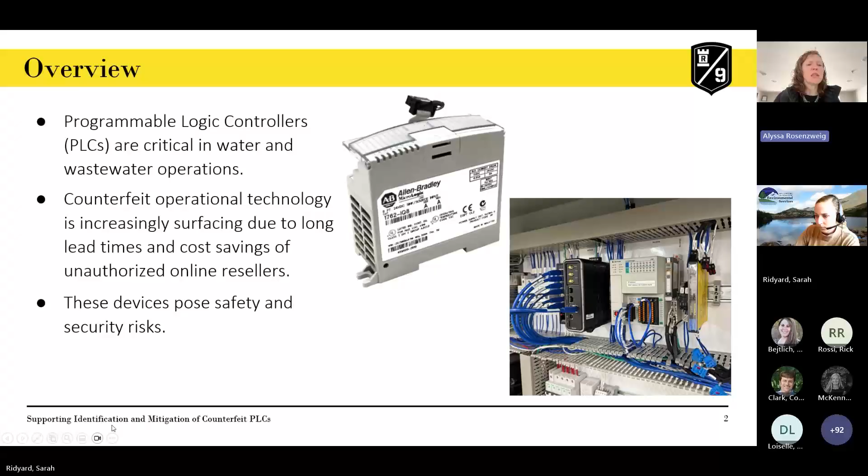So, next slide—we wanted to walk you through identifying if one of your items is counterfeit, meaning nobody knows what that device was actually designed to do, whether it's going to do harm to your environment, or whether it's going to allow foreign adversaries access to your environment to do Lord knows what. We are still actively trying to get our hands on some of the ones identified in New Hampshire to see if they were malicious or just more knockoffs.

Part of that effort is spreading the word of the threat and helping make sure folks check to identify if they have any counterfeit PLCs in their system.

You may be aware, you may not be aware. Sometimes it's a choice you make when you've got a budget constraint, and you think, I've got to get some parts from eBay. Or there's a timing constraint—something is actively failing and you can't get it through a valid supply chain. Either way, you still need to check if it's any good.

One important thing to note: your default move to check if something is real would be to reach out to the manufacturer. But we've found that isn't even enough to give full reassurance, because there could be a valid serial number that counterfeiters are just reusing on multiple devices. So it really requires looking more closely at what's going on.

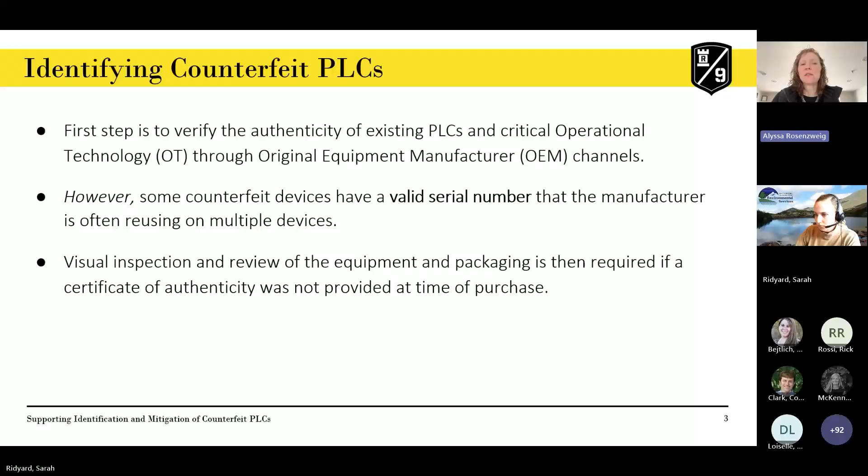In the next couple of slides, we wanted to give you some visuals of what this might look like. They're subtle—you're looking at that cartridge or the packaging you might have. This is exclusively, to our understanding right now, within this Rockwell Automation Allen Bradley family.

We're fortunate that DES and a bunch of other folks in the cyberspace are ready to support you in many generous ways. If you've found, willingly or unwillingly, that you have a counterfeit device, please reach out to the email address provided. We'll work together to walk through the steps to remove it, identify what's going on, and create a replacement plan. We're really trying to make this free where we can, following all the steps and collaborating together, knowing financial hurdles are huge when you're trying to run an operation.

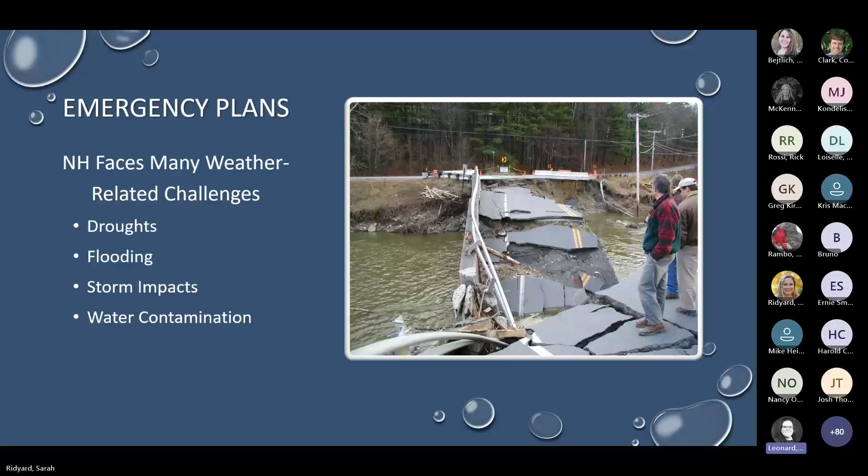AWIA is America's Water Infrastructure Act of 2018, signed into law October 23rd, 2018. The purpose of this law is to make sure community water systems are prepared for emergencies. It requires water systems serving more than 3,300 people to assess their risks and vulnerabilities to natural disasters, hazards, and malevolent acts. Along with an assessment, you're also required to develop or update your system's existing emergency response plan based on those risks. The goal is to protect public health and continue offering reliable drinking water. It also ensures utilities can prevent, respond to, and recover from disruptive events, and it takes emergency planning from a best practice to an expectation.

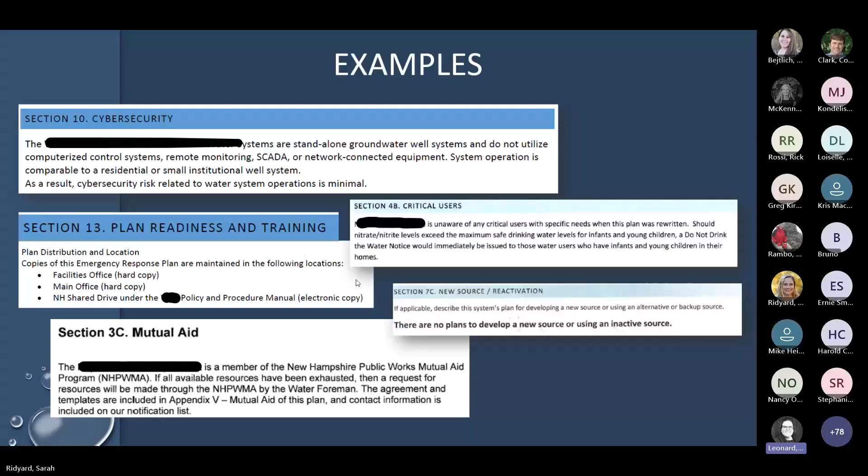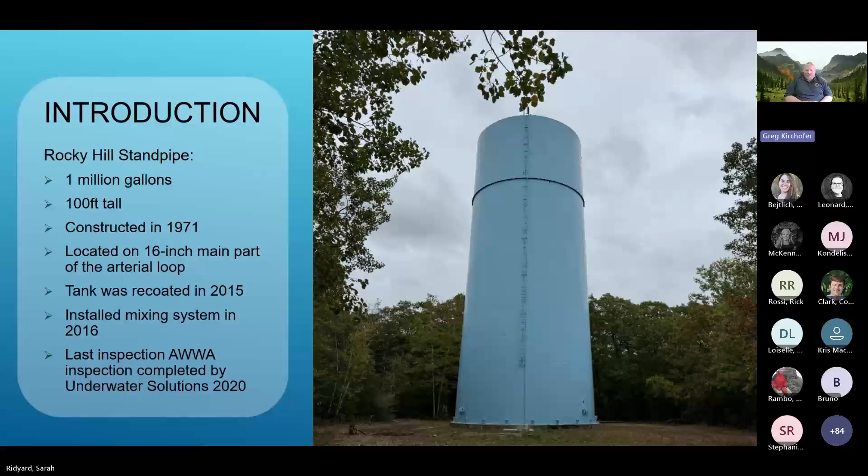So we'll go over a little bit of the timeline of events. We received a report of an open hatch by a resident that was walking the dog in the area of our tank. Our tank is located off the beaten path, it's kind of up in the woods, so there tends to be residents that pass through there, which is actually helpful to us because if they see something, they usually will say something to us, which works well. So we had on-call staff respond to investigate and see what we were dealing with, what it was, the vault on the ground, or a hatch on the tank. Staff verified there was a hatch open on one of our top hatches on the backside of the tank. We elected to isolate the tank from the distribution system just out of precaution because we don't know what we're dealing with.

One of the things I don't have on this timeline, but we did contract with our local high school, they have a drone program there, so their drone pilot came out. This was on a late Friday evening. We had him come in Saturday morning. We did a drone flyover. Nothing out of the ordinary other than the hatch was open.

Everything was very visible on top of it, but there wasn't any more suspected issue. But it was something we wanted to take very seriously and use our emergency response plan to further address it.

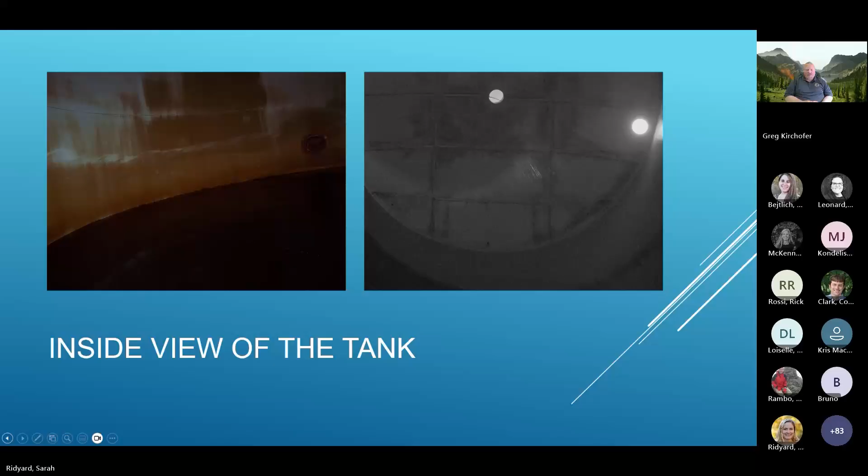Next slide, please. Post-cleaning, they did a great job. The floor and walls have a little bit of staining, which is typical unless you do some sort of excessive cleaning—for the most part the walls were fairly clean, but I wanted to illustrate how great the floor looked when it was done. They checked basically every inch of the tank inside to make sure nothing was further tampered with, even looking down the inlet pipe. It was determined that more than likely it was just somebody fooling around with the tank, which caused the big issue for us.

So after the tank inspection, we made sure the tank was secure and locked, with locks on both hatches. This hatch isn't normally used since it's on the north side of the tank. The other hatch, which we normally use for inspections when we send a diver in, is right at the ladder on the south side, where there's also a ladder up to the center of the tank. We wanted to make sure that post-inspection, everything was locked and secured.

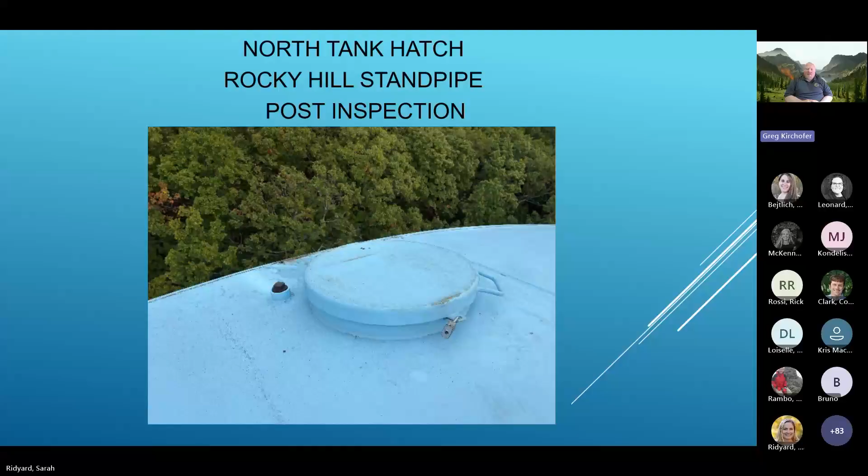So a little summary of our actions and what we learned through a series of events.

Thorough observation: when conducting tank inspections, visually verify that there are no open hatches by viewing the top from all sides. We don't know exactly how long this was open for, but we realized we really have to be observant. It's not something that's just going to stand out, because unless you were almost directly under the tank on the back side, the open hatch wasn't really visible. If you had imagery from above, you could definitely see it. So that was one of the things we learned, that we really have to keep a close eye on this tank when we're doing inspections.

Faster response and notifying DES. DES was notified a little bit later than I was supposed to, outside of our 24-hour window. It's faster for us to get more help by notifying them early. So this is one of the things we learned, to make sure that one of the first few calls we make would be to DES to notify them.

Conduct weekly inspections. City policy was updated so that we now do weekly inspections, and we developed a checklist so that everything is basically laid out for whoever the operator is doing the inspection, to make sure we're thoroughly checking and getting a good eye on everything around that parcel. Like I say, it's up in the woods, so it's not something that's regularly visited. We want to make sure that if there's anything out of the ordinary, we're picking it up and documenting it and addressing it.

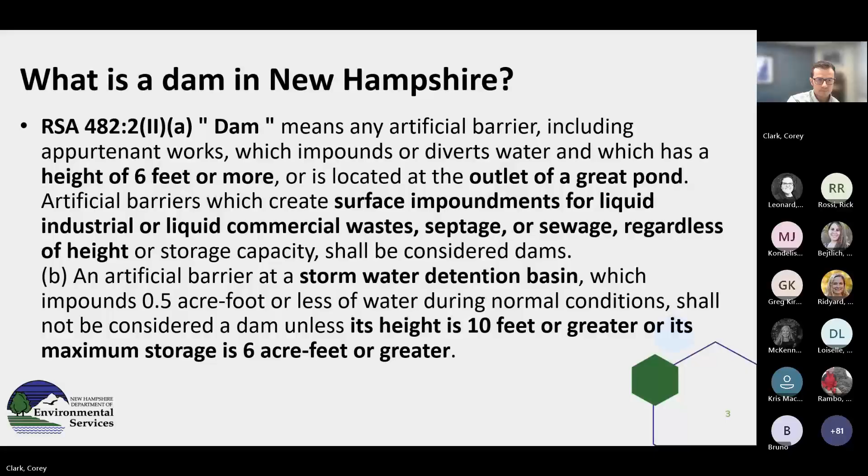So the Dam Bureau, some of you may have heard of us or run into us at different times. This is a quick overview of the Bureau. We're actually broken into 3 different sections, and I'll go through each section individually.

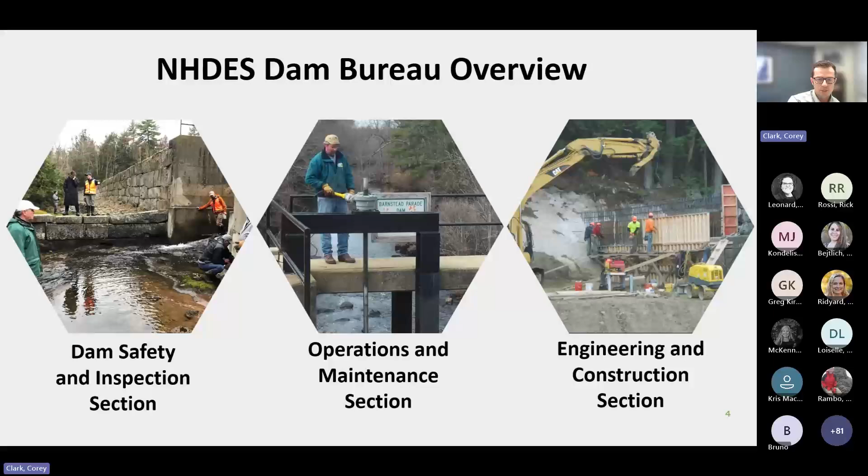We have the dam safety inspection section. Those of you with lagoons or drinking water reservoirs are probably most familiar with this section. It's made up of the men and women that do all the inspection and permitting for all dams in the state, the 2,600 registered dams I mentioned earlier. We cover everything from up near Canada all the way down to the Massachusetts border, and are responsible for all the permitting and inspections at all of those structures.

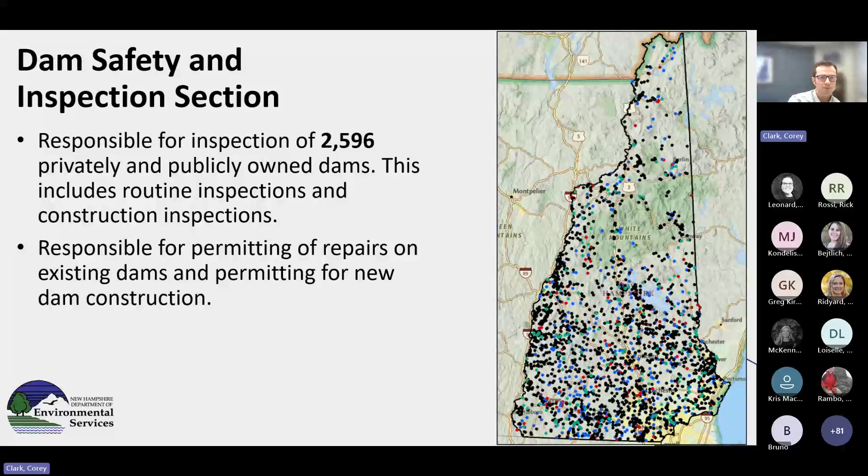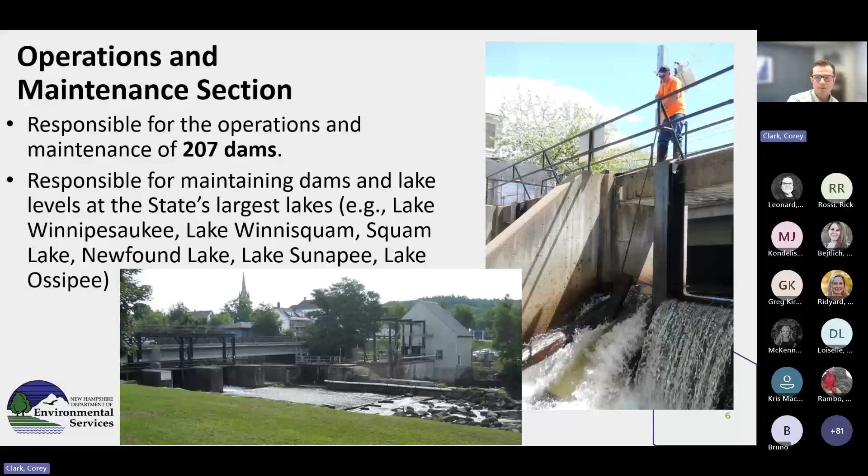Then we move into the operation and maintenance section. I mentioned earlier there are 275 state-owned dams. Of those, 207 are actually operated directly by NHDES, and that includes the outlets of the big lakes, Lake Winnipesaukee, Newfound, Squam Lake, Ossipee, and many others throughout the state. We do all the operations at those facilities as well.

Jumping into the engineering and construction section, those men and women are responsible for all state-owned dams throughout the state. That includes all the major reconstruction projects, not only at the outlets of the big lakes, but many smaller dams located throughout the state, such as within state parks, fish and game wildlife management areas, and elsewhere.

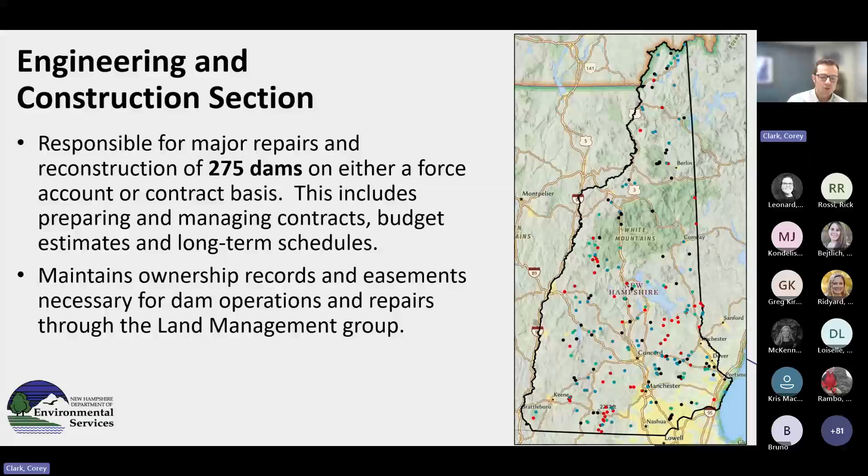Those men and women actually do the construction projects in-house. We have our own in-house construction crew. Some of you who travel on 89 have probably seen our new operation facility right off of exit 2, with the mural running across the 8 large garage doors facing I-89. The operation and maintenance group works out of that facility along with the engineering and construction section.

However, with the ownership of so many dams, there are 64 high hazard dams owned by the state. With those 64 high hazard dams and 34 significant hazard dams, all of those dams are required to have an emergency action plan, which I'll be diving into a little bit more.

The photos here are actually of Copps Pond Dam up in Tuftonboro, a high hazard fish and game dam that was reconstructed several years ago. You can see the emergency action plan, the actual inundation area, outlining different items that would be impacted if that dam was to fail.

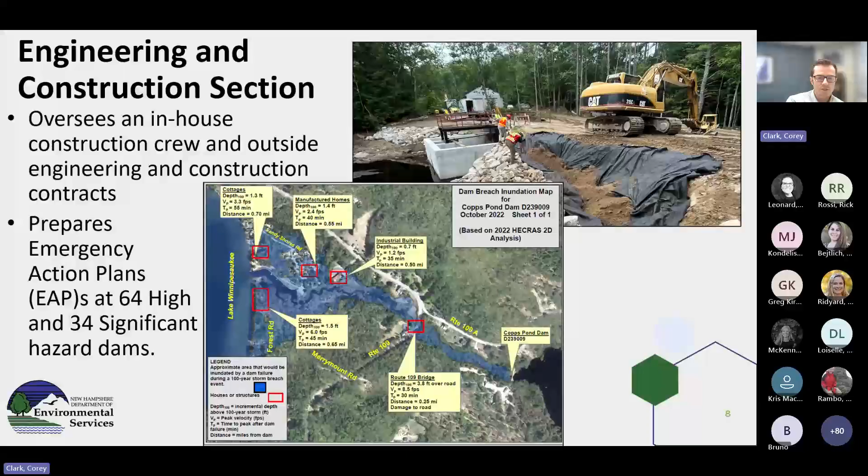So emergency action plans, what are those? Well, those are actually defined in statute. There's a written document delineating a prescribed sequence of actions to be taken by a dam owner to inform authorities and others downstream of an impending or actual sudden release of water.

So it's basically a plan required to be developed by the dam owner that brings together all the various local entities as well, fire, police, any other local emergency management personnel that may be involved, other dam owners, things of that nature. That plan not only has to be kept on file with the dam owner themselves, but also those local emergency management directors, along with state police and others, so that when those plans need to be activated, they can be done so appropriately.

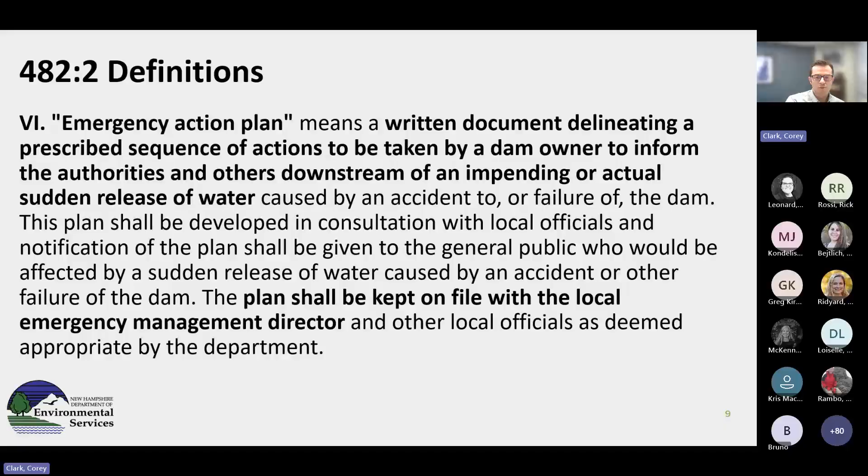So diving into a little bit more, basically those men and women that go around to do all the inspections at all public and privately owned dams, our dam safety and inspection section, are responsible for overview of all emergency action plans. I mentioned earlier the engineering construction section; those men and women are responsible for developing the plans, but actually maintaining the plans and making sure they're up to date is our dam safety and inspection section.

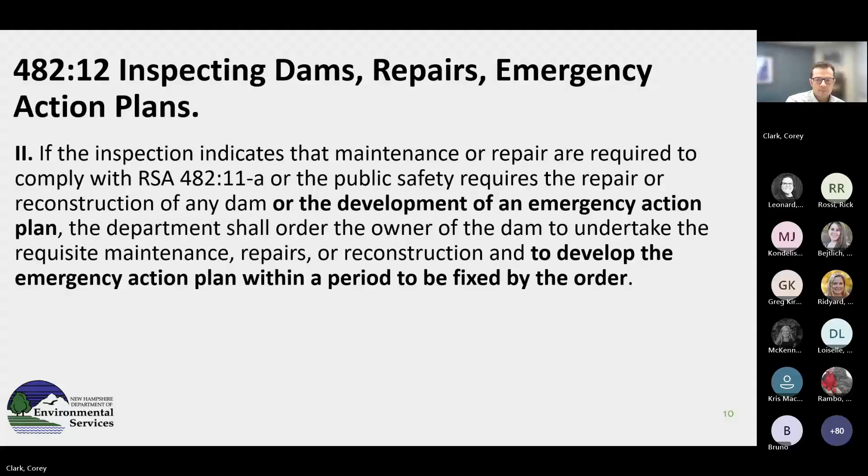So now diving into the rules a little bit more, what exactly is the meat and potatoes of an emergency action plan? One, it's got to clearly define the area which would be inundated if the dam was to fail, and there are certain parameters that determine that. When I mention dam, this applies regardless if it's a dam that impounds a lagoon, a drinking water source, or any recreational body of water throughout the state. So you have to define the area that would be inundated downstream, provide the notification procedures, and the responsibilities of different individuals and agencies during that response. And once again, the owner of the dam has to prepare this emergency action plan.

Diving into the rules a little bit more. If you have a plan on file, you're responsible for actually testing that plan, basically the notification flow chart. I'll show you one here in a minute, but you have to make sure that the proper people are being contacted when the emergency action plan is activated.

It starts with 911, basically falls down through that tree. My number is actually located on all emergency action plans in the state as the contact for the Dam Bureau. I work to make sure the men and women, primarily in the engineering construction section, or if it's a state-owned dam, the operations section, are being contacted properly.

You have to do that test every 2 years if you have a high hazard dam, or every 4 years if you have a significant hazard dam. Annually, you actually have to review the EAP and make sure that if changes are needed, you actually implement those changes.

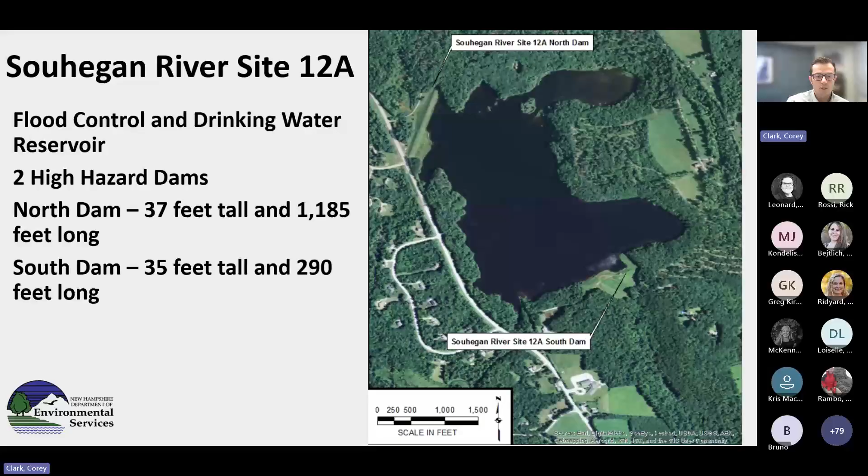So I'll dive into the emergency action plan that we have for these high hazard sites. First step, we have the notification flow chart. The one thing that we have in the Dam Bureau notification flow charts is always starting with 911. Even if there's a member of the public out there walking their dog and they see something happen, they can basically call 911: 'Hey, I see an issue.'

That 911 call into dispatch is actually going to move down through state police, and then I am going to get a call directly from that so we can respond accordingly. It will also activate the other various entities, such as the Hillsborough County Sheriff's Office, the Greenville Fire Department, Greenville Police Department, Milford Area Communications Center to contact Wilton as well, and Southwest Fire Mutual Aid to contact Temple, because you have multiple communities involved when you activate these emergency action plans.

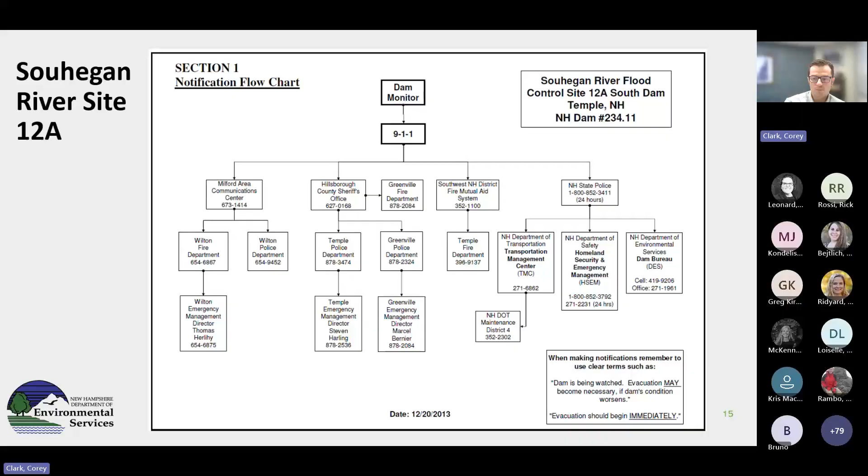Because downstream of these dams, the flow actually moves through multiple communities. Here's a zoomed out portion of the inundation map. You can see on the left we have the 2 dams, one outflow indicated in one color, the other in another color, because if those dams were to fail, the water would enter 2 different stream or river systems and basically converge down in Wilton, eventually moving down through the downtown area of Wilton and down through Milford from there.

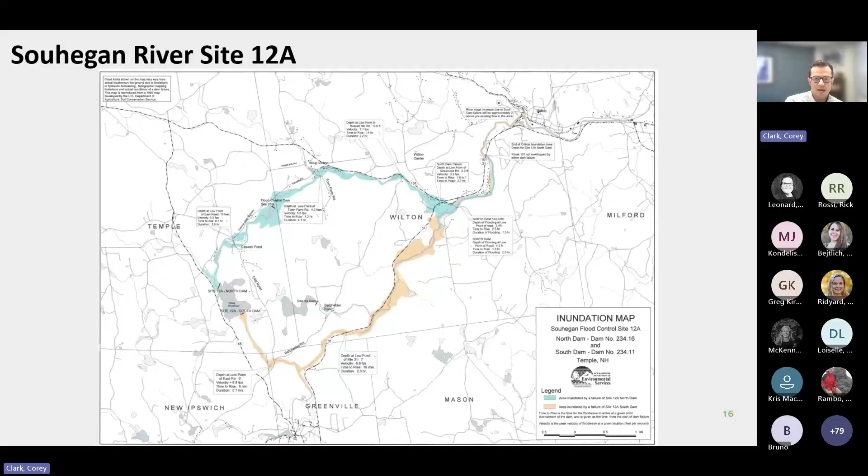So what do you actually have to look for with these emergency action plans? Zooming in on the town of Wilton, there are notes here that call out the velocity of the water, the duration that the water is going to be overtopping in particular locations. A couple of things that always come up is, what is the response time? How much time do we have from when the dam actually fails until this road or piece of infrastructure is going to be inundated.

So you see here these examples: depth of low point of Greenville Road, 2.3 feet of water, time to rise, 1.6 hours, and time to peak, 2.7 hours. So you have about 1.5 hours before that road starts being impacted, and it's going to be impacted for a couple more hours after that occurs.

So you can see here all the homes within that inundation area, all those black dots, will have to be evacuated. That's basically an exercise done by the local response officials who pull that EAP off their shelf to dive into it, along with the dam owner as well. The other thing that all of these EAPs point out is when does the critical inundation area end?

So here in the state of New Hampshire, it's basically 1 foot of change. If the flow from the dam failure is 1 foot or less, that's where the EAP kind of ends. But up until that point, you've got to be on your toes making sure you're paying attention to who needs to be evacuated downstream and where exactly those floodwaters are going to go.

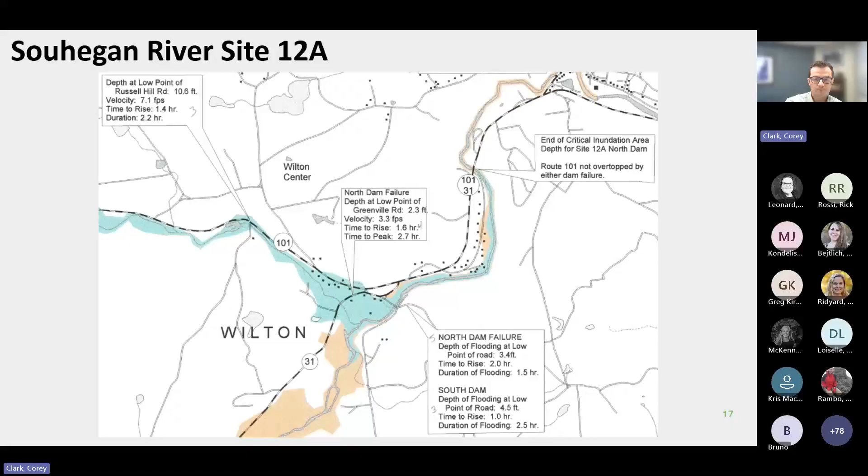Jumping into wastewater lagoons and EAPs, one thing I wanted to point out is that prior to 2024, and this probably impacted some people on the call, if you had a lagoon that stored sewage or septage with a storage capacity of 2 acre-feet or more, that was classified as a significant hazard structure, regardless of downstream impacts. So even if there were no impacts downstream, if you met this criteria, you had a significant hazard structure. That rule was actually changed in 2024 to remove that.

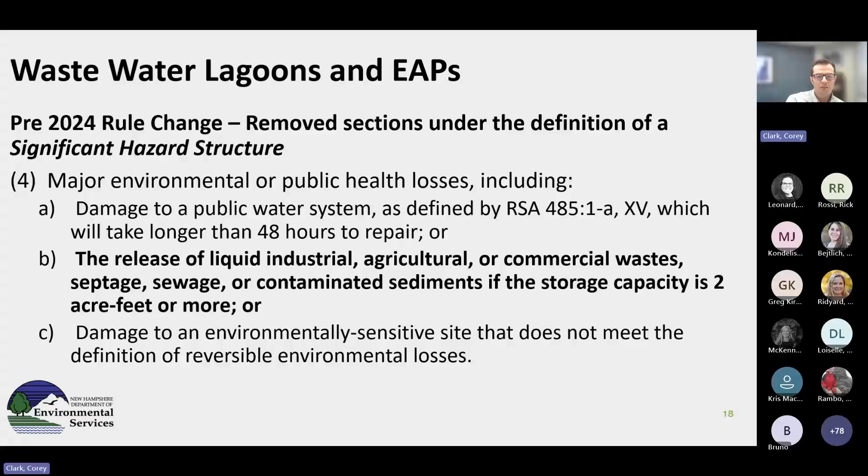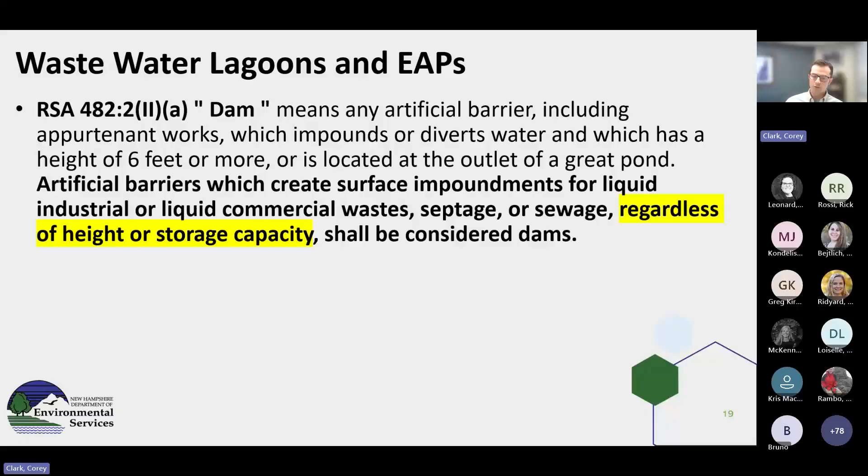So now it's solely based on impacts. Once again, regardless of your height or storage capacity, if during a failure of that lagoon it impacts downstream homes, businesses, or roadways, that is what your hazard classification is based on. No longer is it based solely on the contents of the lagoon.

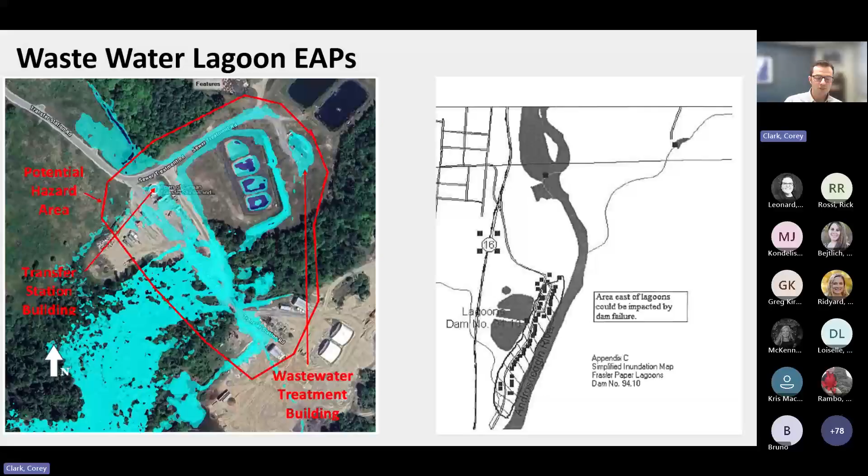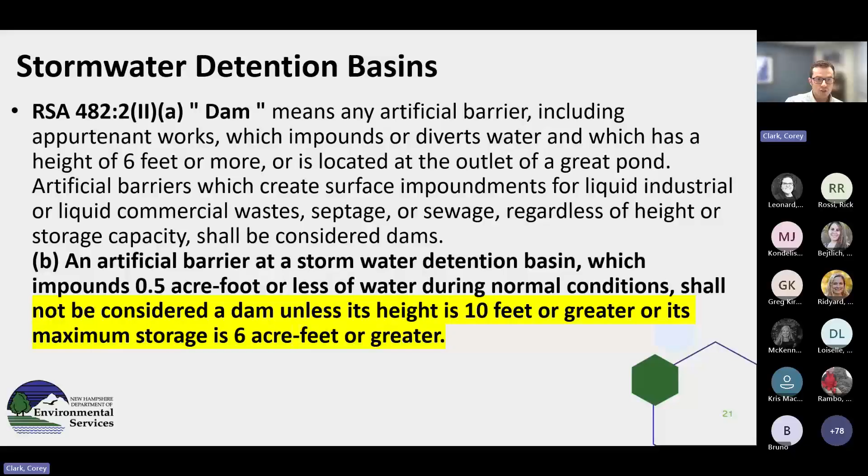Finally, we jump into stormwater detention basins. Like I mentioned earlier, unless the dam or stormwater basin embankment itself is over 10 feet in height or has a storage capacity of 6 acre-feet or greater, chances are it's not an actual dam. In 2006, the state statute was actually changed.

So prior to that, you may have had stormwater detention basins throughout your community, on the order of 5 to 7 feet tall. But after 2006, the statute was changed to redefine what a dam is, and at that time a lot of those stormwater detention basins became exempt.

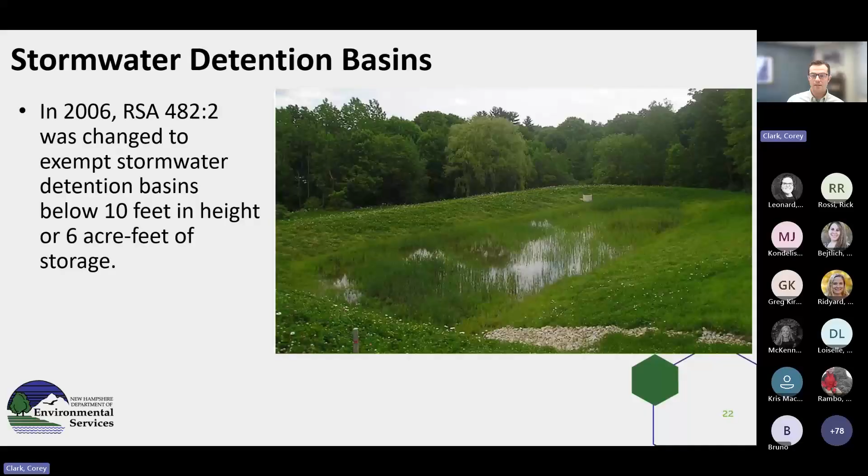Here's an example of a DOT stormwater detention basin that actually does qualify as a dam. The height of the embankment is over 10 feet, and I'll show you here in a second how that is measured exactly. But this qualifies as a dam in the state of New Hampshire.

So when we get plans from developers or highway entities for a stormwater detention basin, we look at how high the man-made portion of that embankment is. Not solely how tall the embankment is, but really what it boils down to is how much of that is man-made engineered fill. That's how that 10 feet is measured.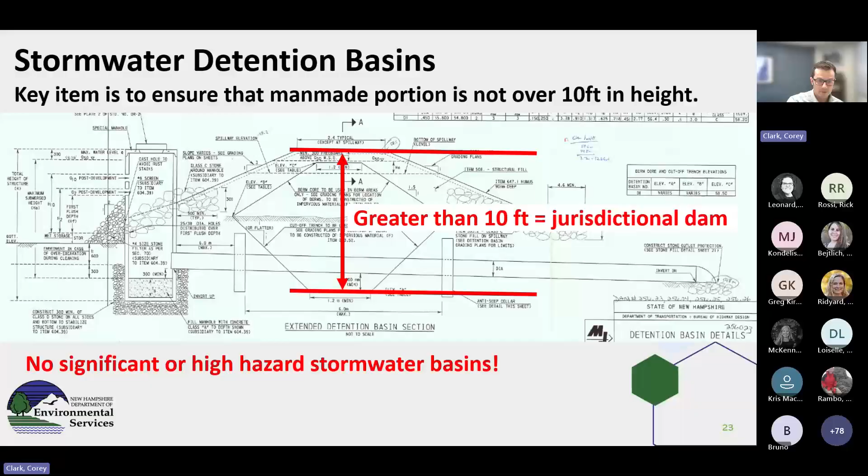Fortunately, here in New Hampshire, while we do have many non-menace and some low hazard stormwater detention basins, we do not have any significant or high hazard detention basins. Therefore, there are no emergency action plans associated with stormwater detention basins in New Hampshire. However, if you have a low, significant, or high hazard dam, such as a stormwater basin classified as a low hazard structure, you're still required under the state dam safety rules to develop an operation, maintenance, and response plan or form.

That is, once again, another template that we have on our website. Basically this provides the location of the dam, the owner of the dam, the height, and really kind of a simplified emergency action plan, essentially. Who's going to be contacted, what needs to be done during an incident, and how is that incident addressed? Now, a lot of the information in this might be same as the information in an EAP.

However, this cannot take the place of an emergency action plan. So if you have a significant or high hazard structure, you still have to have an emergency action plan in place along with this OMR form as well.

That way we can be in the know as to who to contact when an issue actually arises. And a lot of times these are actually more valuable during those times in which, hey, there's high water out here, there's no need to activate the emergency action plan, but we want to make sure that whoever is responsible for the site is taking active measures or just being aware that water is getting high in this general vicinity within the state. And so this is where these OMRs come into play.

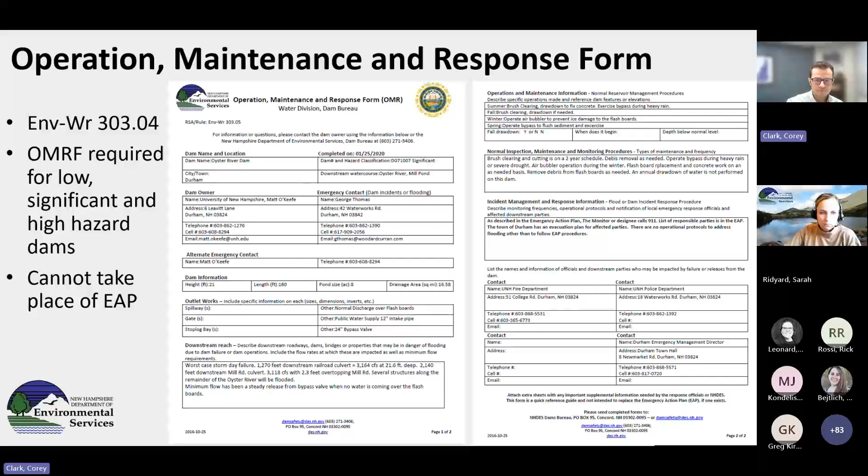And really with that, that's all I had. Just a quick overview of emergency action plans here in the state of New Hampshire, how they impact particularly wastewater and drinking water facilities, and then stormwater detention basins. Certainly reach out anytime if you have any questions. You can find all those different forms on our website as well. And thank you for your time today.